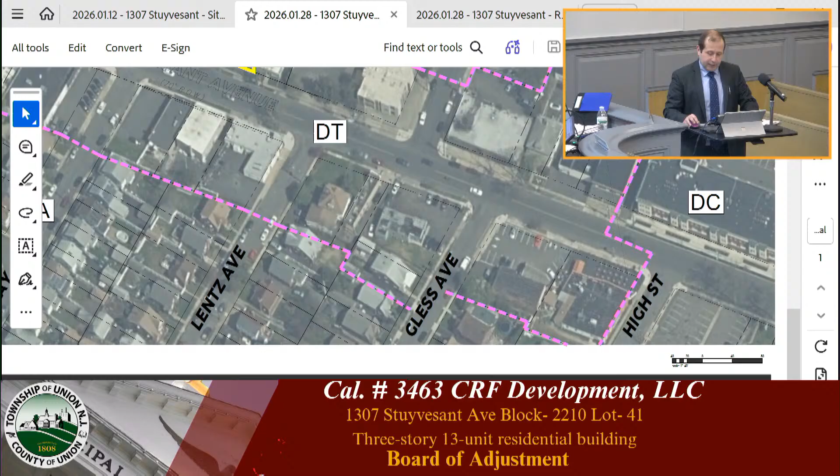Okay, well why don't we start with, why don't you give an overview of what exists on the property today? So I'm going to go to my first exhibit, which is entitled 1307 Stuyvesant Avenue, aerial exhibit, marked A8, with a date of January 28, 2026.

So it's a general aerial of the vicinity of the site. The site is highlighted in yellow, as seen in the middle of the screen, with the zoning shown as well in the surrounding area. As mentioned earlier, it's known as 1307 Stuyvesant Avenue, block 2210, lot 41, located in the DT, downtown transition zone. To the north, you have the NC, neighborhood zone, and to the south, the DC zone. And on either side of that DT zone, you have the RA residential zone. As you can see, the lot is surrounded by both residential and commercial uses.

The site itself is slightly trapezoidal, not a perfect rectangle. It has a lot area of 12,652 square feet, or about 0.3 acres. Currently on the site was the old Weichert building, a 2.5-story building for a real estate agent. There was, and there still is, a parking lot in the rear for 15 parking spaces.

The house itself, so if you know the site kind of slopes up to where the building is, and the building is actually on the highest part of the property. As I get into my testimony, you'll see that the new building will be lowering the grade along that area and dropping that grade.

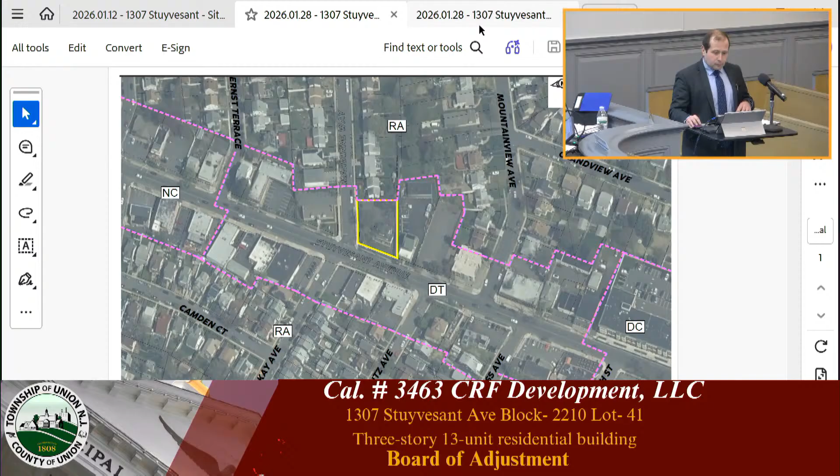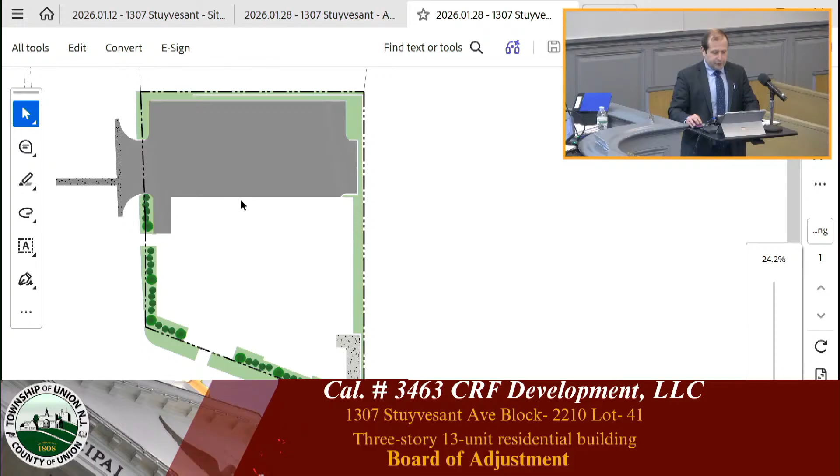Next exhibit I'm going to introduce is entitled 1307 Stuyvesant Avenue, site rendering, dated January 28, 2026. So this is essentially the site plan that was submitted, colored, so it's a little easier to follow what's being proposed, and it also shows the landscape as well.

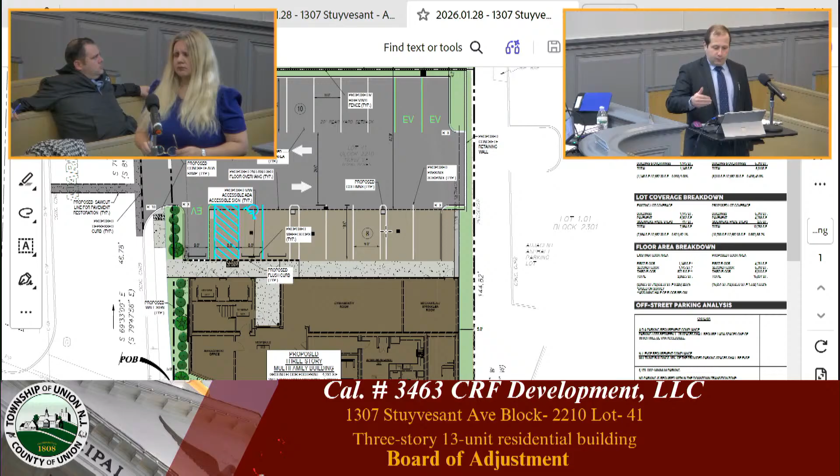But being on Stuyvesant, the whole point of being in the DT zone is to have good frontage along the main thoroughfare. So that's what the architect did, utilizing that by having the building all along the frontage, so it essentially becomes a downtown type of building. And that obviously generates a little more impervious coverage, as it's not as efficient as a rectangle.

Now, I just want to touch on this one variance with you, and then we'll hear it again with the architect and the planner. There was a look at possibly trimming the front of the building, correct, and not having it follow Stuyvesant, which would have eliminated the impervious coverage variance, correct? That is correct.

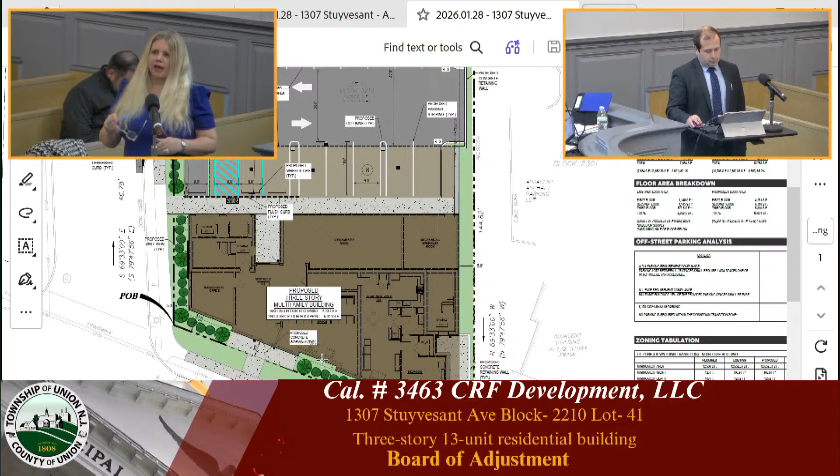And it really wouldn't have changed number of units or any counts, because as you'll hear with the architect's testimony, these are actually pretty large size units, correct? That is correct. So can you show the board with your mouse what we were talking about cutting off on the building, and why it was the opinion of the team to leave that to follow the streetscape?

This corner or triangle portion of the building could be eliminated to make way for the overage on the impervious coverage. But again, as you can see, even the neighboring property, they're all along and parallel to the front property line. It made more sense for our property to do the same.

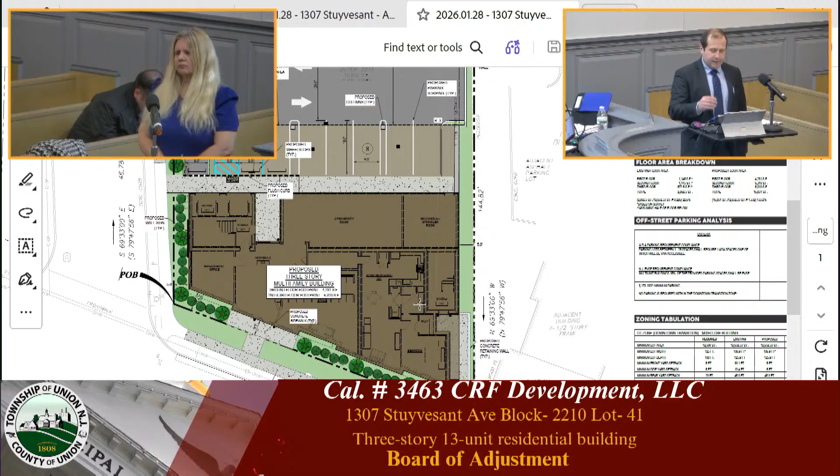I also want to note, we didn't get to the stormwater yet, but we do have a stormwater system as part of this project that's actually, per Mr. Denave's review, oversized per the town ordinance. So even though we're over on impervious, we have an oversized stormwater system that will capture any increase in impervious.

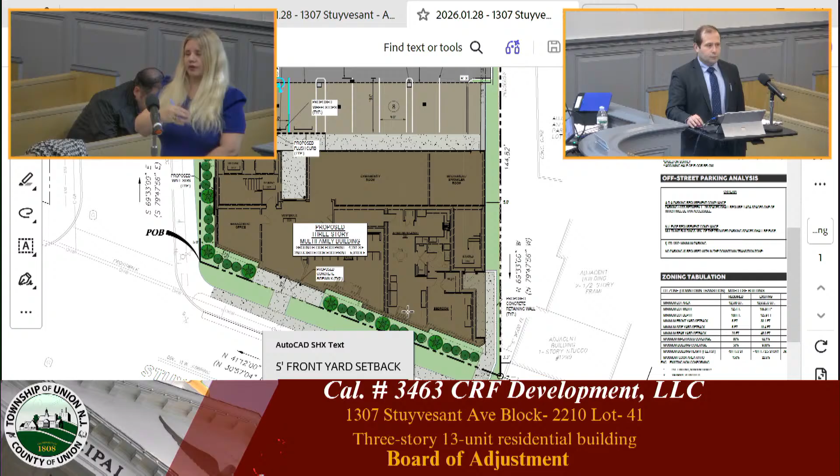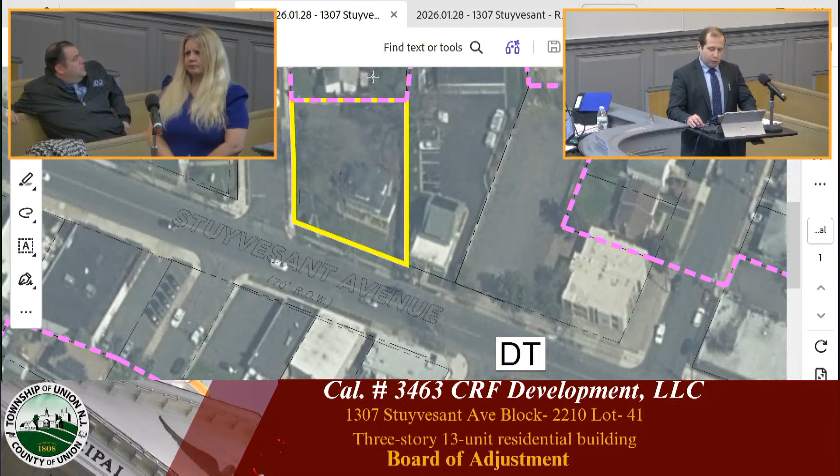Okay, but just going back for a moment on the streetscape, that's the streetscape when you designed the layout, to have the building follow not only the property adjacent to us, but also further down as far as how they front along Stuyvesant and how they follow the street, correct? Correct, and you can see it here, how all these properties have the same parallel. And even the Weichert building itself has a parallel, it's just set back a little further.

Thank you. Can I just ask, I don't like to jump in, Rosemary, but we're going forward with what amounts to an amended site plan, based on the history that your attorney gave from the planning board time to the original submission here, and now we're here with an amended submission. Can you spend a moment addressing what exists on the site and how it relates to what you're looking to change it to? It seems to me that's relevant for the board to consider, especially in the D1 context. So it should start with the notion of what is there by way of a structure and how it compares to what it is you're proposing to do.

Sure, so I think I did touch on what's there, or what was there was a 2.5-story Weichert, the old Weichert building. I'll break it down a little further, and I have the existing conditions of the site plans that were submitted. Shown here where my cursor is, the 2.5-story building. As this site grades from the corner of Stuyvesant and Marianne, it actually grades up to where the building is, so the building is elevated compared to Stuyvesant. And then there's an existing driveway, ingress only, off of Stuyvesant, shown here where my cursor is. The driveway goes around the building, and then there's a parking lot in the rear with 15 parking spaces. And then at Marianne Way, that's an ingress and egress driveway.

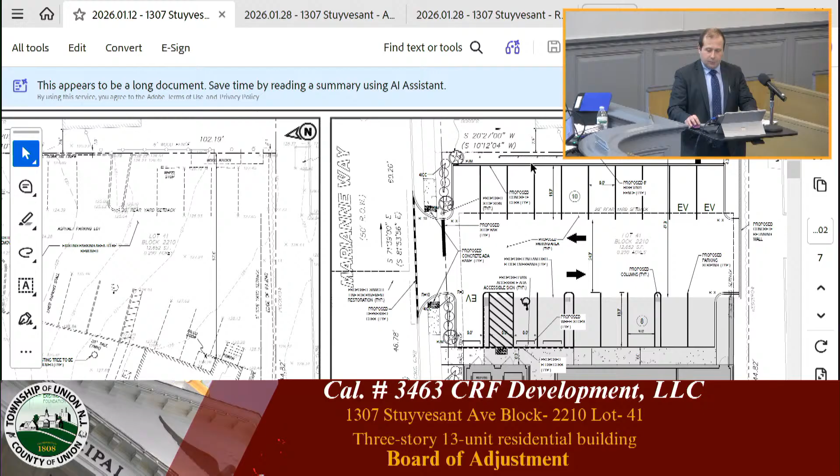But that ties into some of the expansion of the impervious area, correct, from what exists there now to what you're proposing to do? Correct, and you can see here the existing parking lot touches the property line to the neighbor to the east, and in our new design... No, I understand you referenced it, but that to me, I think, is important for the board, who's familiar with the site, but the context of what exists now to what you're proposing to do adds to the facts as it relates to the impervious coverage tied into your D1 variance. So that's what I wanted to make sure was clear in the record.

Thanks. You're welcome. So just going back to A9, which is the site rendering. The architect will go into a little more detail about what's being proposed in the building, but I do want to touch on a couple items as it relates to the site. I'll zoom in a little bit.

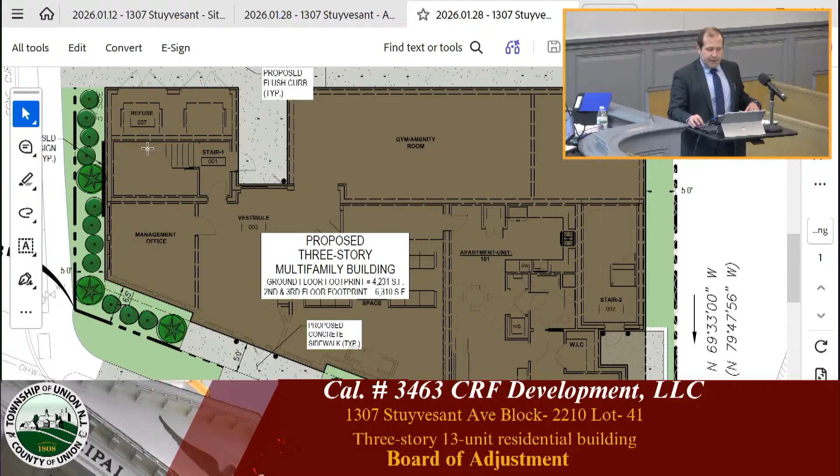So as mentioned, we do have one apartment on the ground floor, which will be ADA accessible, showing here where my cursor is. We do have a lobby and amenity space located in the middle of the building. There'll be both entrances from the rear parking lot and also access from Stuyvesant to allow the residents to walk that corridor more easily. We do have space for a management office, and then in the rear is the refuse area, which is located inside the building. During trash pickup and recycling pickup, those will be wheeled out and picked up by the private hauler and then brought back in by property maintenance as well.

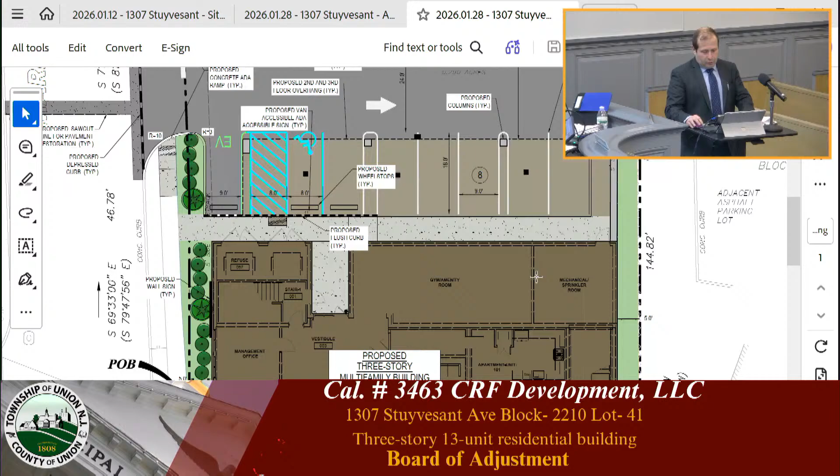As mentioned earlier, the driveway is going to be closed along Stuyvesant, adding one more parking spot. We are proposing in the rear 18 physical parking spaces, so 3 more than what's existing out there today.

And of those 18 parking spaces, one of them will be ADA compliant with the handicap requirements for ADA parking spaces. And we are proposing 3 EV parking spaces, again, which comply with the requirements from the state mandated ordinance for EV.

The way that works is you have to install 1 spot at the time of CO, 1 additional spot within 3 years of your CO, and then the 3rd spot has to be installed within 6 years of your CO. So you have to make sure that they're equipped, they have the conduit and have the capacity to have an EV charger placed in those spaces.

Obviously nobody here was at the planning board meeting, but some of the concerns we have from the fire official on the planning board was that originally the EV spaces were underneath the canopy of the upper floors. So in this new plan, we eliminated that. All the EV parking spaces have open air above them, not underneath the building, for fire issues or fire concerns.

The state has a mandate as far as how many EV parking spaces are required for a site, and they also provide you a credit. So by planting or placing an EV parking space, you get a 2-for-1 credit on those parking spaces, up to 10% of the parking spaces. So essentially, even though we have 18 physical parking spaces, per the state code, we actually provide 20 parking spaces for this facility.

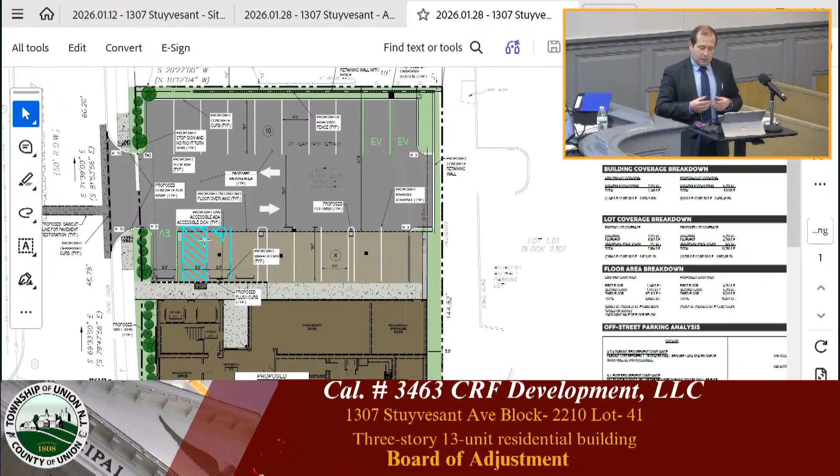When you say your office did a parking analysis, are you the witness who is going to support that data? Yes. Because I didn't mark anything by way of a parking analysis.

And, you know, the Collier's report is clear about what it's saying. You're explaining it, but the way it's written, at least to me as the lawyer, and I have to educate the board on this, suggests that there's a deficiency in what's expected there by way of parking, correct? 22 is what they're looking for, 20 is what you have.

That's what I think Mr. Denavi wrote, but I don't know if that's the way the ordinance is written as far as the downtown transition area. Did you follow up at all with him since the issuance of the report to try to get an idea of why he feels that it's non-compliant, and you're saying that it should be compliant or deemed compliant?

No, I mean that's a problem, as you can imagine. Yep, I haven't reached out to Mr. Denavi on that. Well, I guess just for clarity of record, Mr. Denavi actually did not write the report. Your team has had several conversations with Mr. Denavi going back from the planning board to now, correct? Correct. The report was actually issued by Joe Venezia. So there has not been any communication with Mr. Venezia? It's all been with Mr. Denavi, correct? Correct.

Okay, but I raise it as a concern because you've kind of glossed over it. You offered an explanation, I'll grant you that. But the board is driven by its professionals, at least in the first instance for sure. And right now the way it's teed up is: I think Colliers is wrong, therefore you should allow us to do what I'm saying and not what they're saying. That's a problem, as I said. I think I need some clarity from Colliers, if nothing else, to try to address that discrepancy. The problem, EV calculations notwithstanding, it seems to me there's a shortage of two, giving you the credit, right?